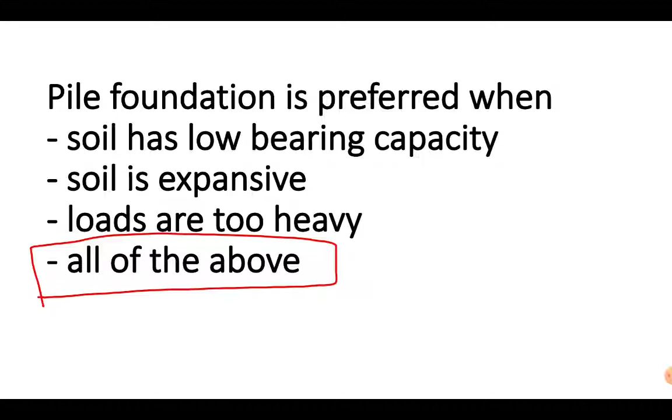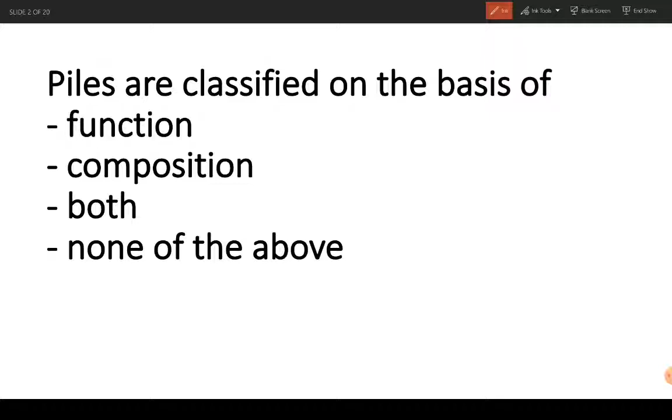Next, piles are classified on the basis of function—how the pile helps the superstructure achieve stability—and on the basis of composition, meaning what material the pile is made of, whether steel, cement concrete, or timber. Therefore piles may be classified on the basis of function as well as composition, so the answer here is both.

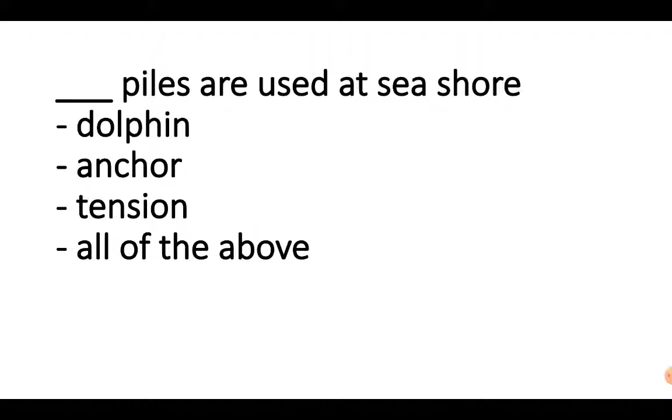Fill in the blank: piles are used at seashore—is it dolphin, anchor, tension, or all of the above? We use dolphin piles to protect the shore structure, the seaside structure, from the impact of waves and from the impact of ships. Anchor pile and tension pile are something else. We use dolphin piles and fender piles at the seashore for protection of the seashore structure, so the answer is A, dolphin.

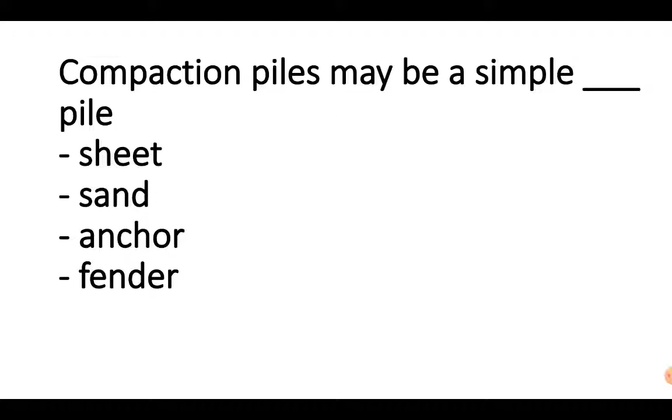Then: compaction piles may be a simple fill-in-the-blank pile. A compaction pile may be a simple sand pile. Sand piles do not take any load. We use a compaction pile that compresses the loose granular soil, and by adding sand to the void, it consumes the space in that area, causing compaction of the nearby loose granular soil and strengthening the nearby soil strata. That's why the answer here is sand—compaction piles may be a simple sand pile.

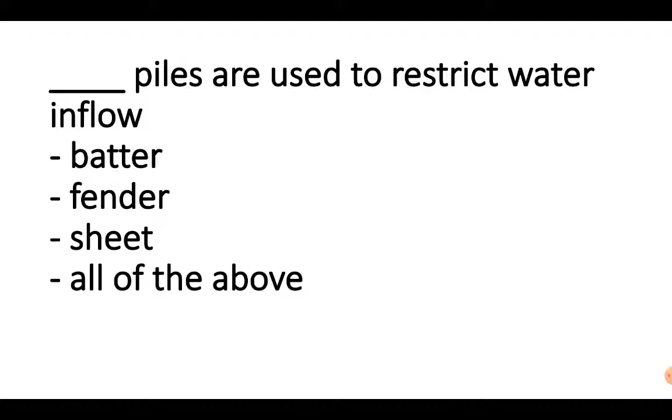Then: fill in the blank, piles are used to restrict water inflow. We can use a sheet pile to restrict the inflow of water, and the same sheet pile can be used in a coffer dam to make a temporary water-holding structure. So the answer is sheet pile—we use a sheet pile to restrict the inflow of water.

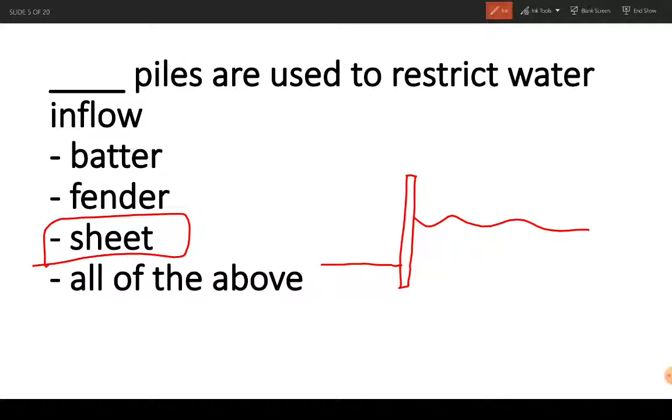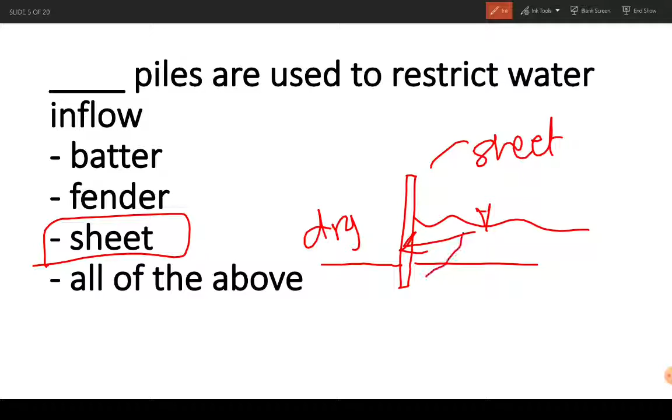For example, let's view this sheet pile in cross section. Here water is present; if we insert a sheet pile like this, the water will not find direct entry into the dry area, because the seepage path will be restricted by this sheet pile.

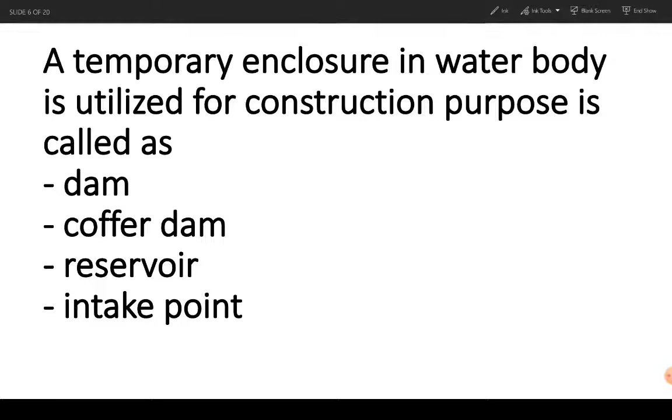Next: a temporary enclosure in water bodies utilized for construction purposes is called a coffer dam—focus on the words 'temporary enclosure,' a temporary structure created to make dry space in a water body. For example, viewing the plan of a river with a direction of flow, if we have to construct a pier or column, we first need to create a dry space there.

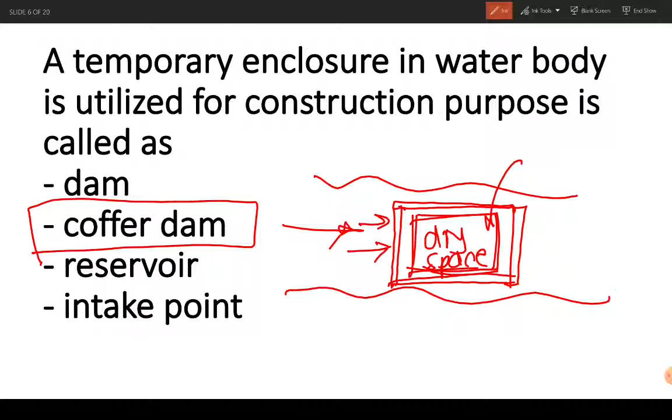To have dry space in flowing or static water, we have to eliminate the entry of water into that zone. This can be done using a sheet pile or an earthen structure, which is called a coffer dam. The coffer dam restricts the entry of water so that a constructor or builder can have dry space for carrying out construction purposes—that is what a coffer dam is.

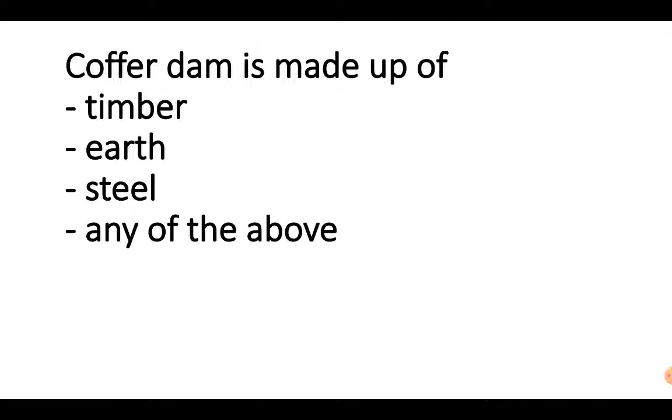Cofferdam is made up of any material provided in the options. You can use timber piles or timber directly, or a pile of earth acting as a temporary barrier to water, or simply steel sheet piles that restrict or stop water from entering the dry space needed for construction. Therefore, the answer is any of the above, since any material works as long as it stops water from entering the desired dry space.

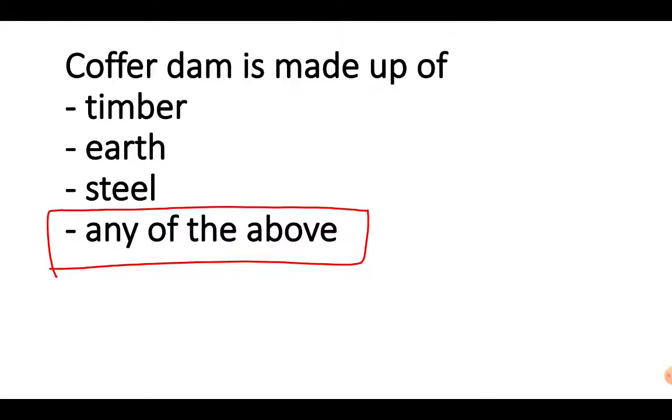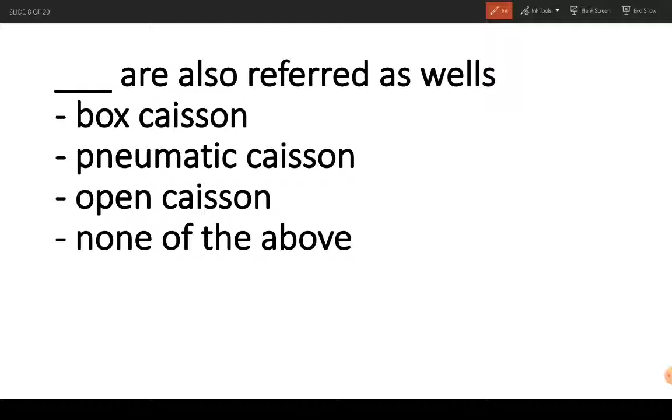Fill in the blank: this is also referred to as a well. Is it box caisson, pneumatic caisson, or open caisson? Box caisson is closed at both ends. Pneumatic caisson is closed at top and open at the end. Open caisson is open at both ends, and the structure of a well is similar, being open at both ends. That's why open caisson is also called a well.

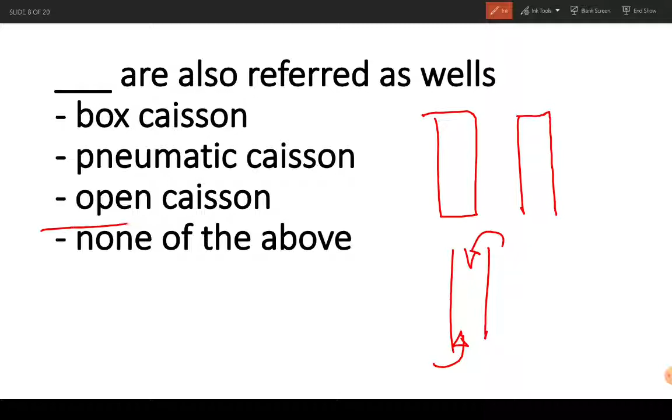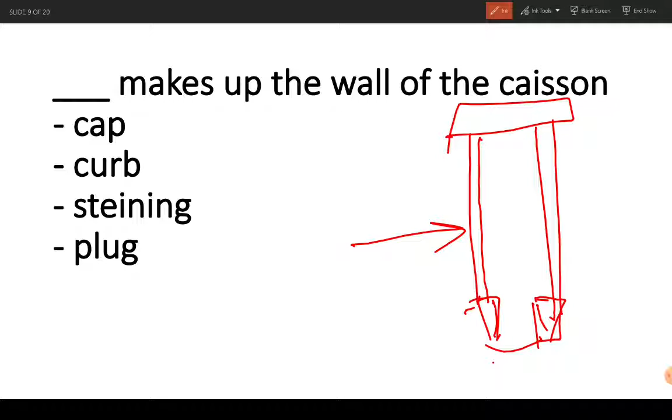Fill in the blank: this makes up the wall of the caisson. When we talk about caisson or well foundation, this is how the caisson looks, with the cutting edge and curb which we'll discuss separately. This specific wall, the body of the caisson, is called steining. Steining makes up the wall of the caisson.

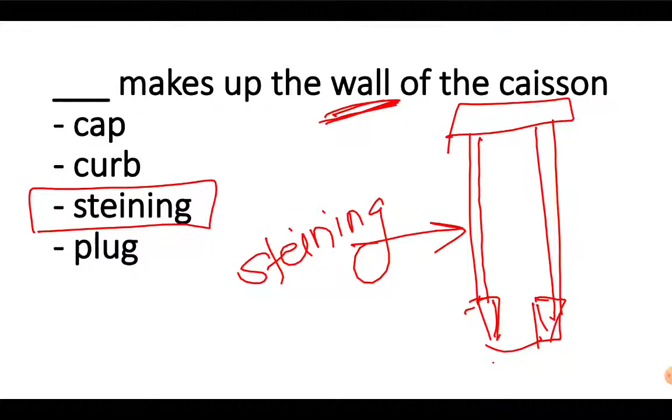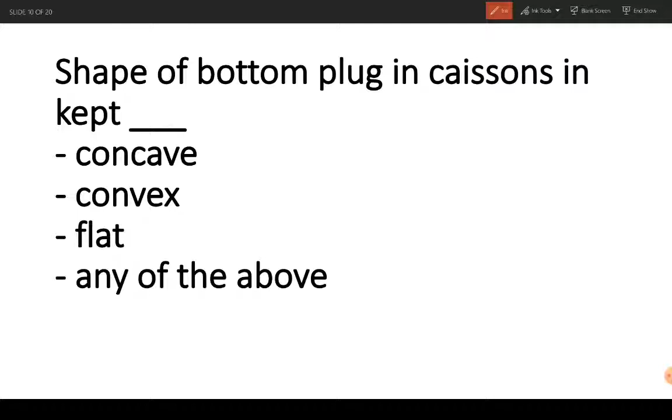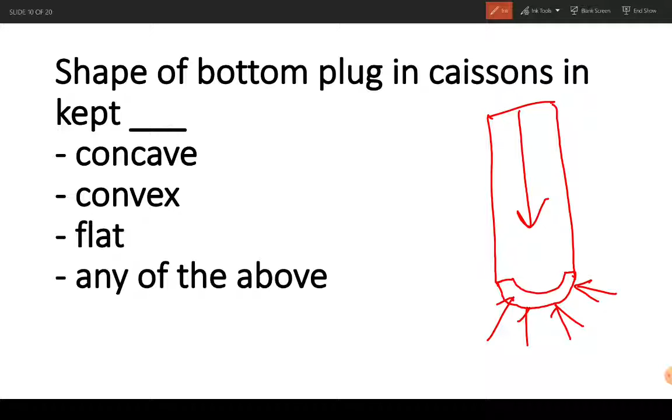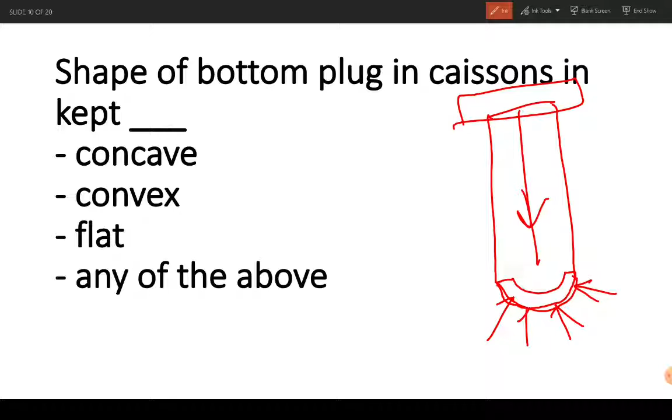Fill in the blank: the shape of the bottom plug in a caisson is kept. Is it concave, convex, flat, or any shape? To make use of the inverted arch action, the bottom plug is kept in convex shape. Because of the convex shape, we achieve the inverted arch action, where the load imposed by the weight of the caisson and the superstructure above is exerted on that inverted arch, helping achieve stability of the caisson or well foundation. Concave looks like this, convex looks like this, and flat looks like this. We prefer the convex shape.

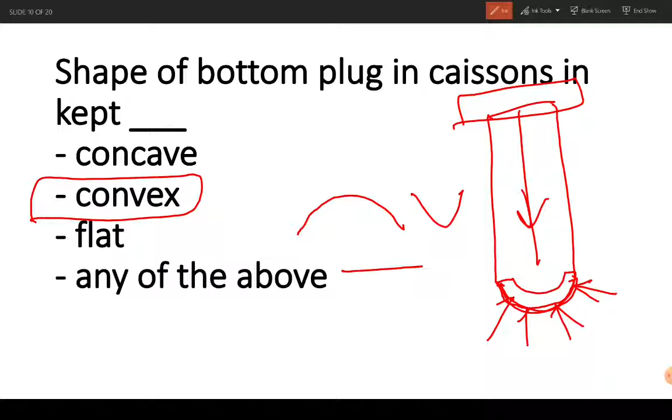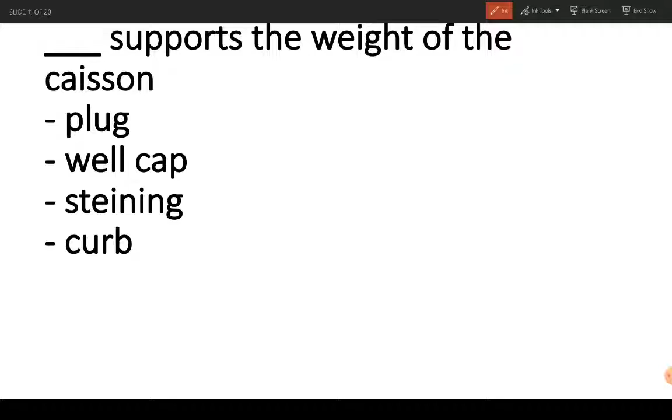Fill in the blank: this supports the weight of the caisson. The answer is curb. Curb supports the weight of the caisson. For example, this is the caisson, this is the curb, and below the curb is the cutting edge. The curb totally supports the weight of the caisson, and in the curb we fit our bottom plug.

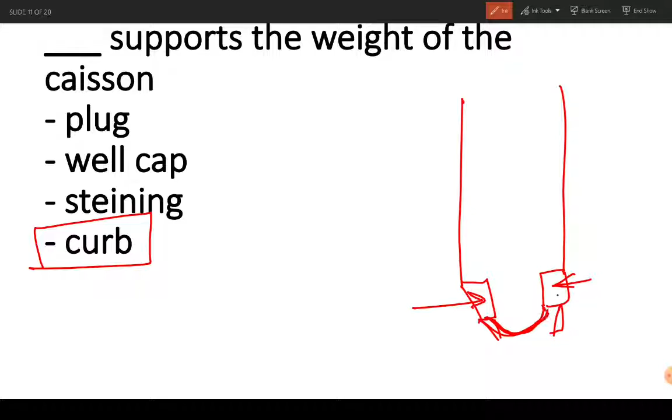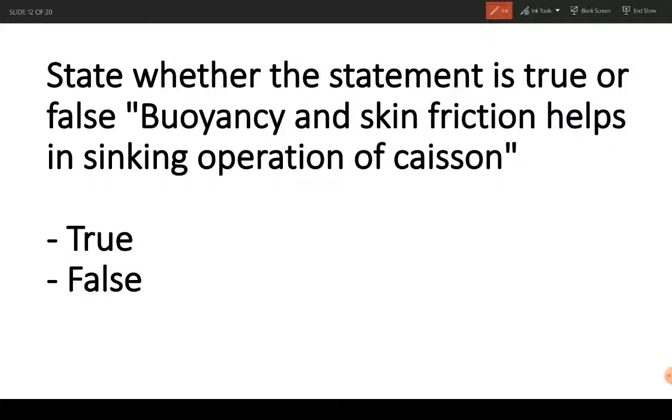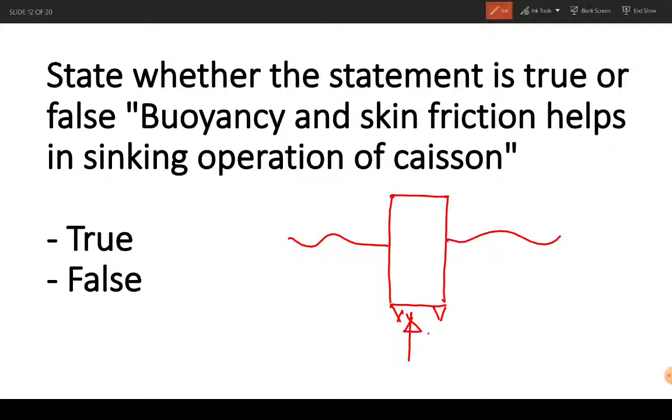State whether the statement is true or false: buoyancy and skin friction help in the sinking operation of a caisson. Let's find out. What happens when we try to sink a pneumatic caisson or box caisson? These are the cutting edges. When it's submerged in water, its weight reduces because of the buoyant force of water, and buoyancy causes restriction to the downward journey of the caisson.

And skin friction, when we try to sink the caisson into the bed of a river, sea, or ocean, the resistance force provided by soil particles in the bed causes resistance to the downward entry of the caisson. When these factors resist downward entry, we won't achieve proper sunken depth for that caisson. The caisson will not stand in its proper position when forces such as buoyancy and skin friction resist its sinking operation. So they are not helping, they are resisting or opposing the sinking operation. That's why we tick false.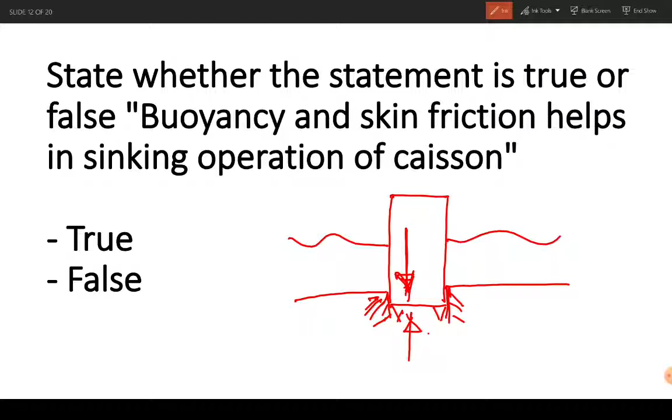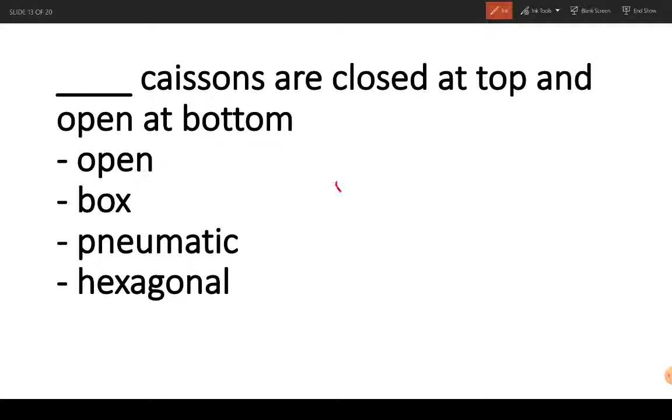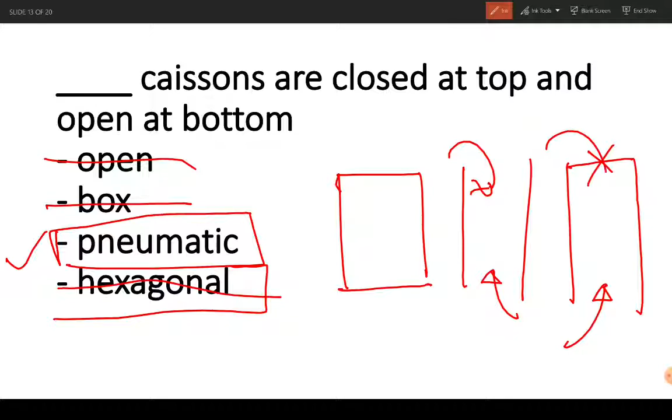Fill in the blank: these caissons are closed at the top and open at the bottom. Box caisson is closed at both ends. Open caisson or well is open at both ends. Pneumatic caisson is open at bottom and closed at top. Hexagonal is just a shape, so that's not the answer. The correct answer is pneumatic, since pneumatic caisson is closed at the top and open at the bottom.

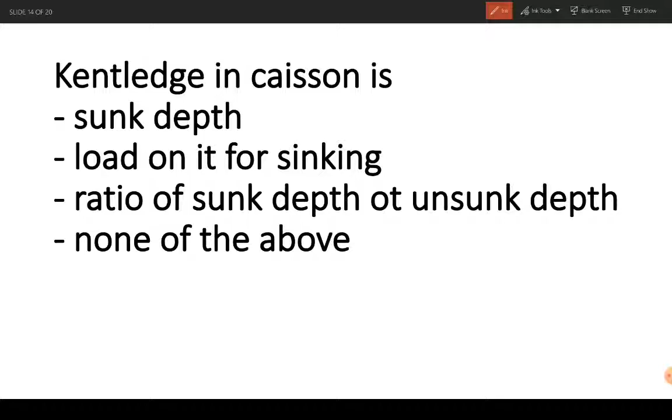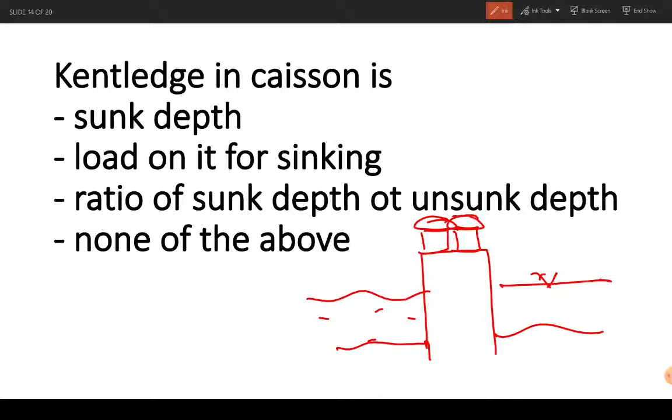Kentledge in caisson is the sunk depth, load on it for sinking, or ratio of sunk depth to unsunk depth? We refer to the load kept on the caisson as Kentledge. For example, in a pneumatic caisson that we want to sink into the riverbed, whatever load in the form of sandbags or cement bags is used for the sinking operation is called Kentledge. Therefore, option B is the answer.

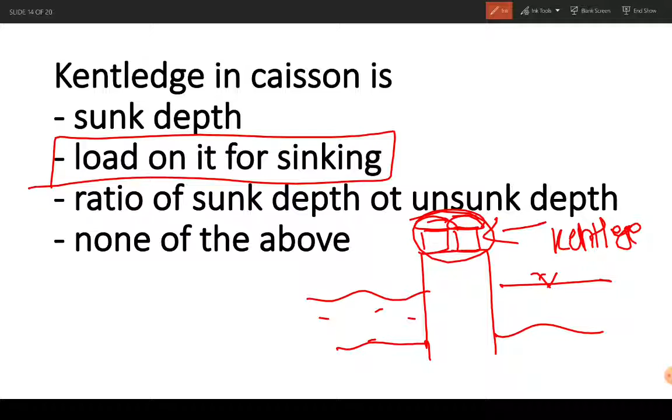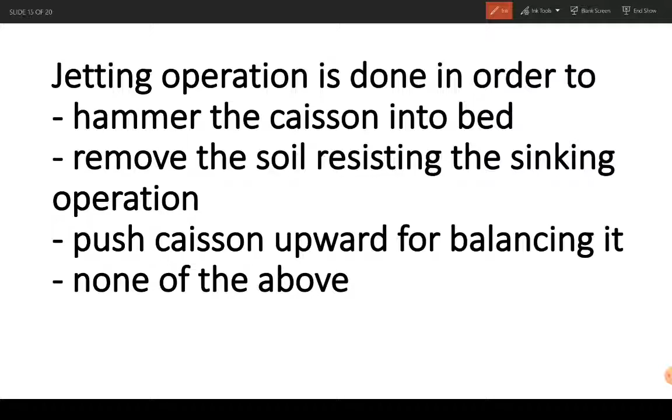Jetting operation is done in order to: hammer the caisson into the bed, remove the soil resisting the sinking operation, push the caisson upward for balancing it, or none of the above? Jetting operation relates to proper entry of the caisson into the riverbed. The sinking operation gets resisted by soil particles present in the riverbed, so we jet water over that area. Because of jetting, soil particles get dislodged and the caisson finds the opportunity to sink deeper so that proper stability is achieved. So jetting operation is the removal of soil resisting the sinking operation. Option B is correct.

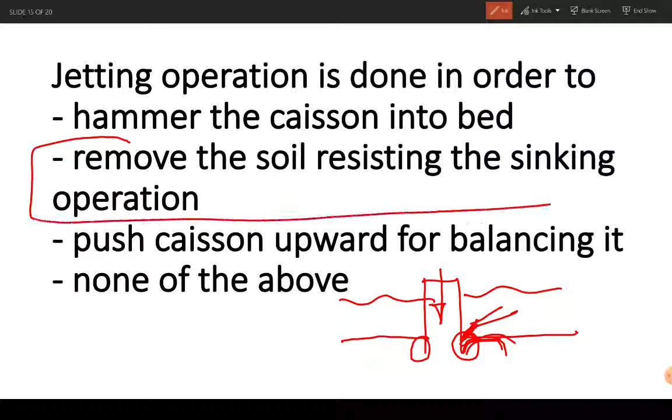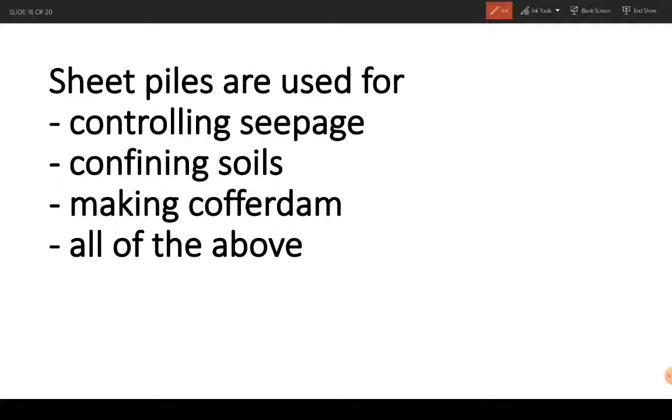Sheet piles are used for: controlling seepage, confining soil, making a cofferdam, or all of the above? You can use sheet piles for any of these. We can have sheet piles sunk into the soil to resist the entry of water. We can confine soil, for example setting up a boundary to keep soil within a periphery using sheet piles. In case we want to make a cofferdam, we can also use sheet piles. Therefore, all of the above is the correct answer.

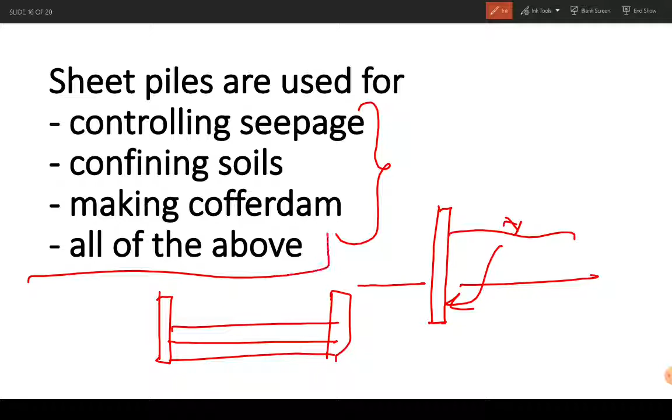Efficiency of a pile in a group depends on parameters such as length, diameter, material — all of these parameters help in increasing or decreasing the efficiency of piles in a group.

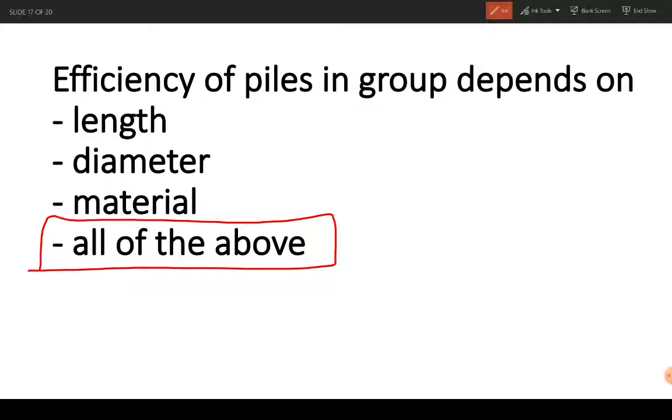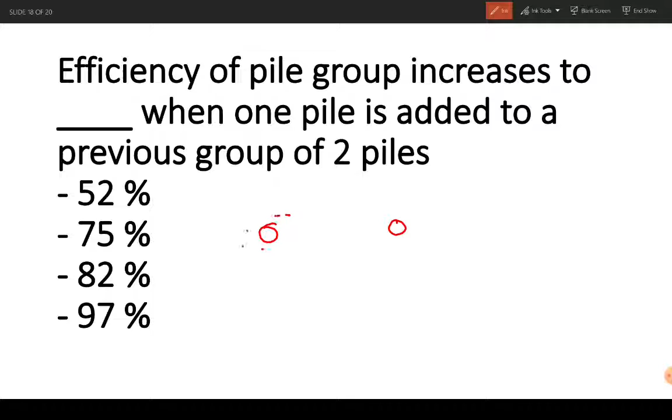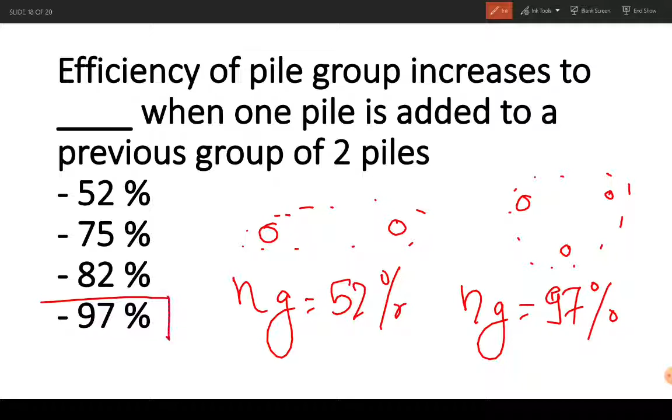Efficiency of a pile group increases to fill in the blank when one pile is added to a previous group of two piles. When we talk about a pile group of two piles, the group efficiency is only 52%. When we add another pile to the group, efficiency increases to literally 97%. So addition of one single pile to a previous group of two piles makes the total efficiency as good as 97%.

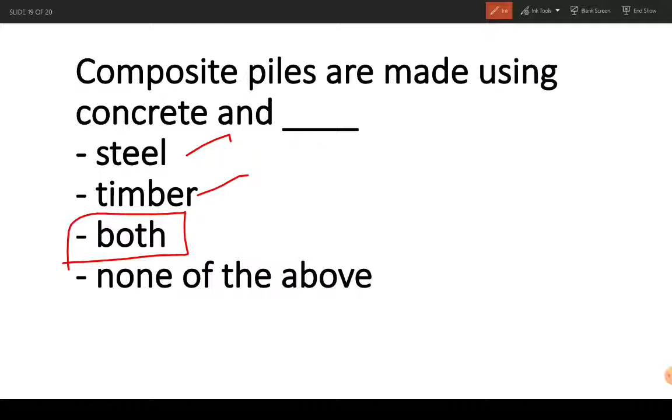Composite piles are made by using concrete. Can we use steel? Yes, we can use steel along with concrete. Can we use timber? Yes. Can we use both? Yes, obviously. A composite pile means it will be having two different materials — steel and concrete can be combined, or timber and concrete can also be combined. Therefore, the answer will be both.

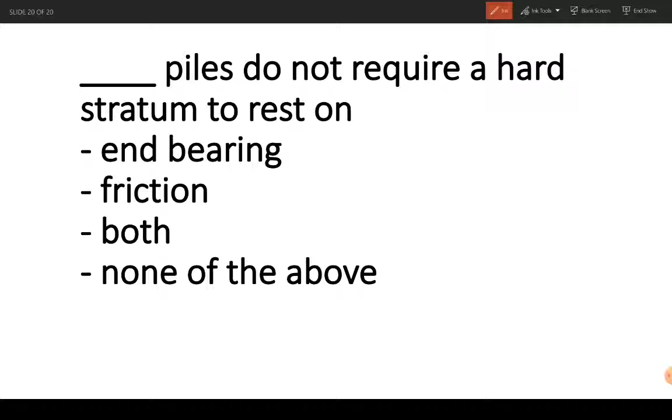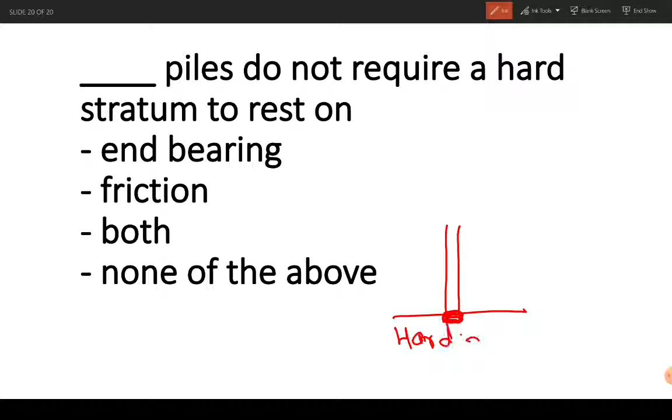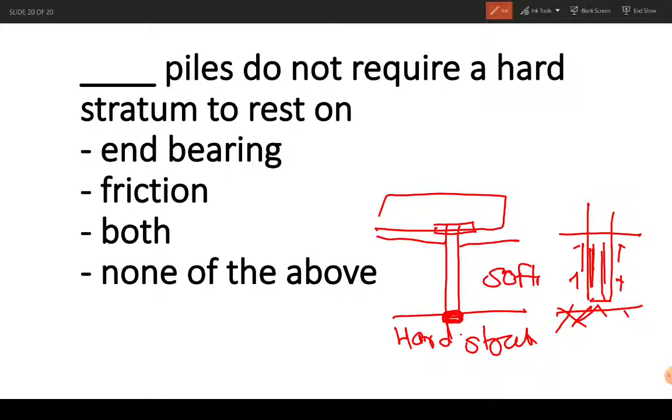Fill in the blank: piles do not require a hard stratum to rest on — is it end bearing or friction? When we talk about an end bearing pile, it is a pile that rests its end on a hard strata, with soft strata above and the superstructure lying over the pile. When we talk about a friction pile, there is soft strata but no hard strata present, and the friction pile achieves its stability by the net resistive force offered by soil particles over the surface of the pile. Therefore, friction piles do not require a hard stratum to rest on.

So that was all for the deep foundation questions. Hope you loved the video.